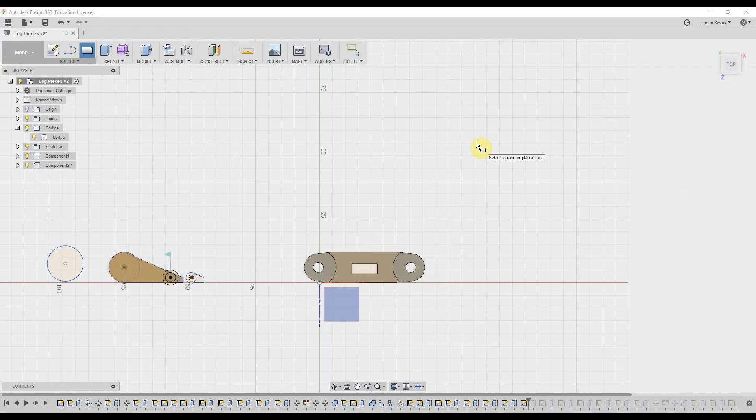So now we've got the foot bone and the shin bone created. It's time to make the thigh bone. And this one's a little bit more complicated because it requires a few extra steps. This is pretty much the same dimensions as the shin. So we're going to create a rectangle that is approximately 25 millimeters by 12 millimeters.

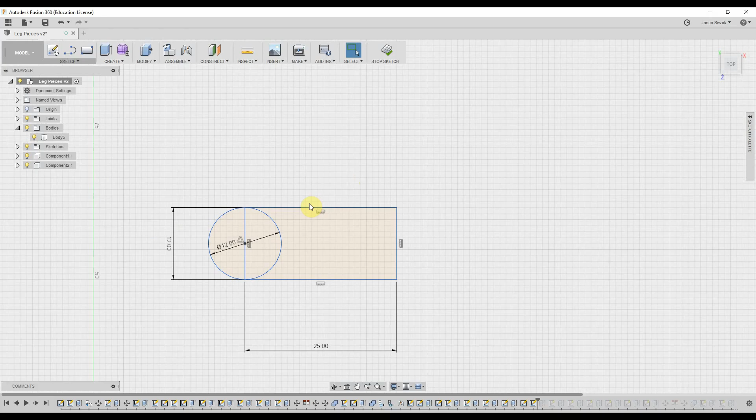Next, we're going to create a circle, and our circles should be approximately 12 millimeters in diameter. We're going to do a simple extrude here of this piece, and that's going to be 12 millimeters in height.

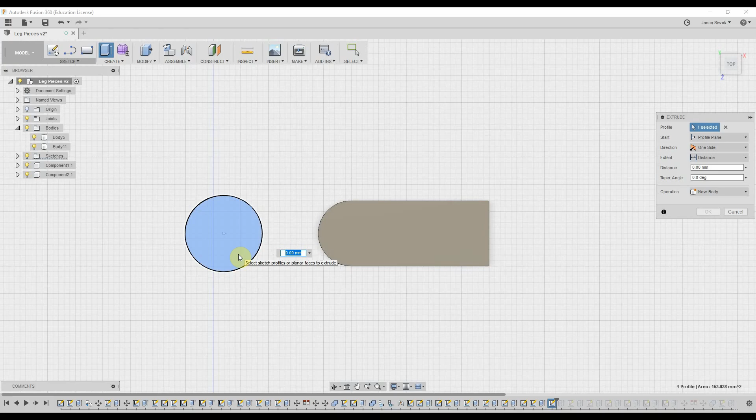Next, we're going to have to make a cylinder to insert at the edge of this to cut it out. This cylinder we're actually going to make a little bit larger than the 12 millimeter diameter. We're going to make it 14. Do a simple extrude. Now, according to our blueprints, this has to be 8 millimeters in height.

Then we're going to do a quick align. We're going to hide that other body. So now we come up here to modify. We select two objects we want to align. Which are these two. Notice how they fit seamlessly in there.

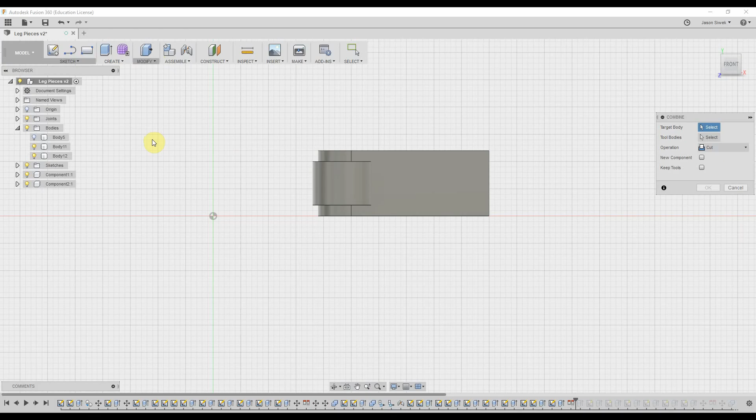Click OK. Next, we're going to go back under modify so we can actually do some subtracting. On the right side, make sure that your operation is indeed cut. Start with your object that you want to keep, which is this one. Then select the object you'd like to subtract. Notice how it turns pink. Click OK. And there we go.

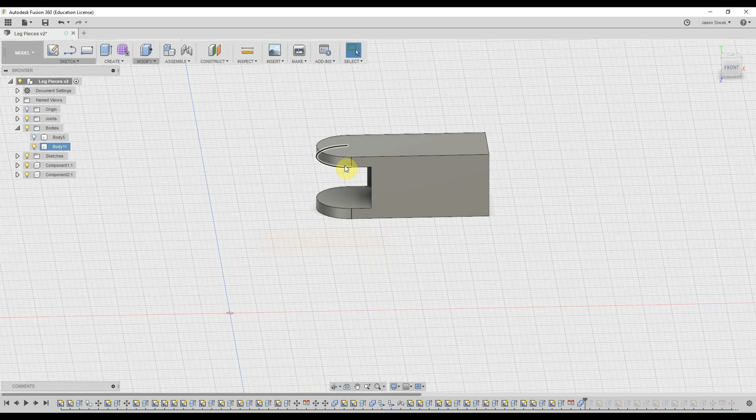Now we have to create the rod that connects these two round pieces so they'll create the actual hinge when it's merged. Make a simple circle. This circle will be 3 millimeters in diameter. Extrude it by 8 millimeters.

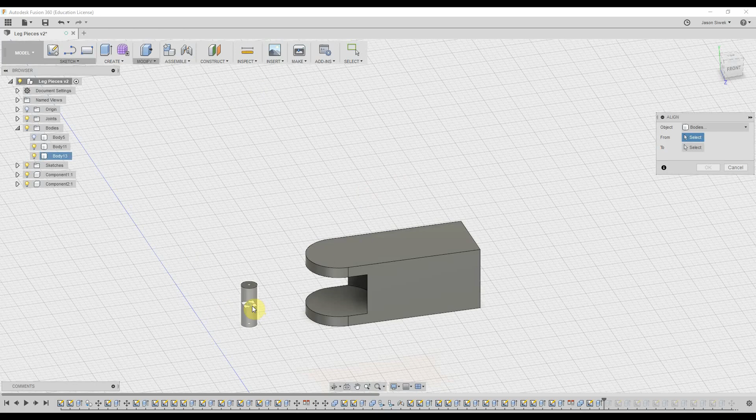So we're going to do some quick aligning here. We're going to go up to modify. We're going to hit the align button. Click on that shape. Click on that. You'll notice that it's perfectly aligned in the center. So we're going to move the rod up by 4 millimeters. And there we have it.

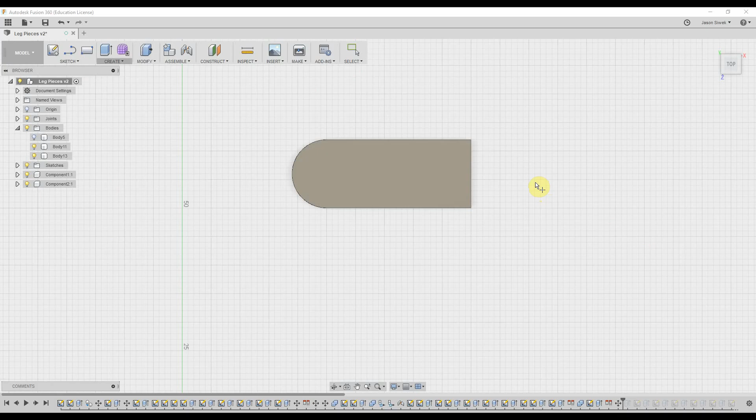Alright, for this next part, what we're going to do, we're actually going to make a sphere. Come up under create, hit sphere, and select the plane you want to draw it on. In this case, I'm drawing it on this plane. We're going to have a sphere of 12 millimeters because we're going to use this sphere and we're going to cut it in half and then we're going to merge it with the leg. So 12.

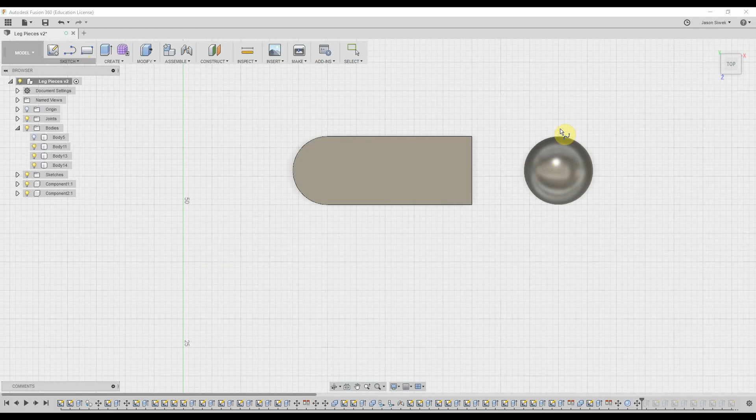What we're going to do, we're going to sketch a spline. And the reason we're sketching a spline is because that's how we're going to be able to cut this unit in half. And we're going to draw a line cutting this sphere right in half.

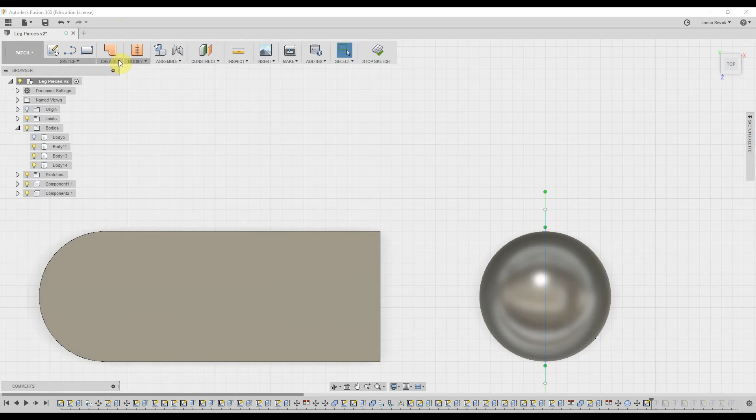Now, this is where we go into a little bit different tool set. We're going to come up here to the upper left-hand corner, and where it says Model, we're going to drop that down. We're going to hit Patch. And under the patch, we're going to hit Create. Then we'll hit Extrude. We're going to extrude that spline, and we're going to extrude it 20 millimeters.

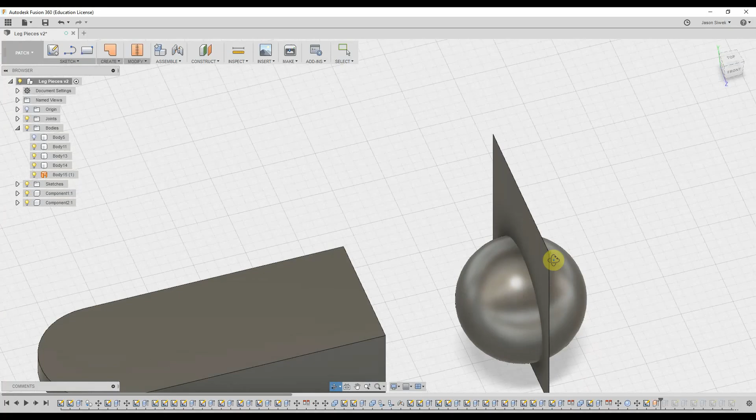I want to make sure I have enough to go completely through with it. Think of it being like an apple and a knife. The spline is the knife. The sphere is going to be the apple. So you'll notice I have a line there, and look, it looks like a giant blade is cutting through. Alright, so now we've got this large looking blade through the sphere.

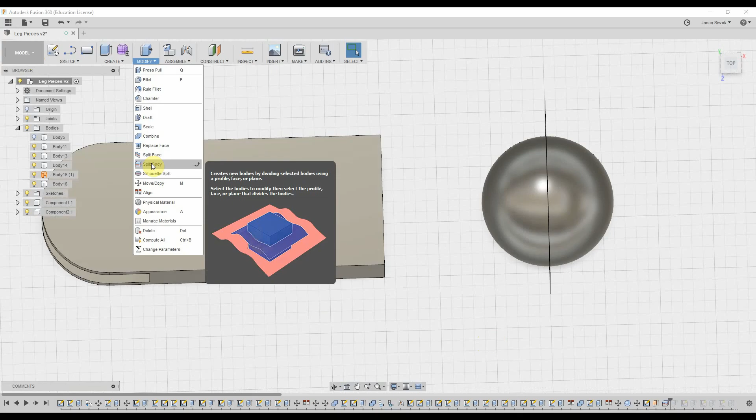What we will do next, we'll come back up to the upper left hand corner under patch, click that so we can go back to our model. Once we go to that, go under modify, and then go under split body. What you'll notice on the right hand side, we have some options here. It says body to split. We're going to select the body we want to split.

In this case, it's the sphere. And what you'll notice when I hover above it, it kind of goes gray to let me know I can work with the whole body. Click on that, it turns blue. Next, the splitting tool.

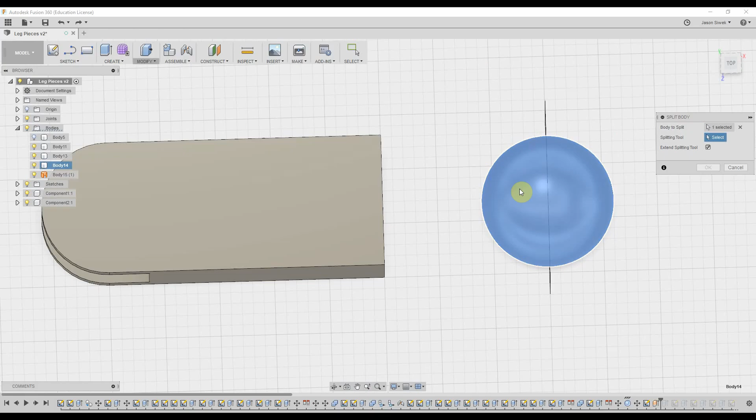What are you using to cut it in half? In this case, I'm going to be using the blade here that I made from the spline. Click that, and then go ahead and click OK. I can now select my move tool and move this part of the sphere up there.

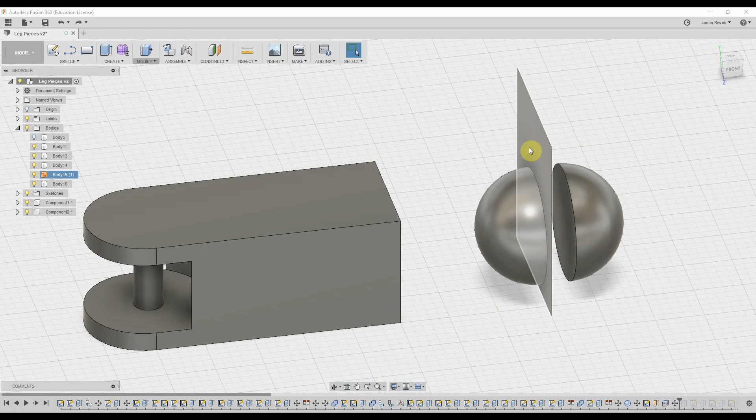Now that we have the pieces split, we're going to get rid of this piece, the blade. We can just come up here, right click, and hit delete. Then we're going to come over to this piece, which according to here is our body 16. I'm going to right click and simply hit remove.

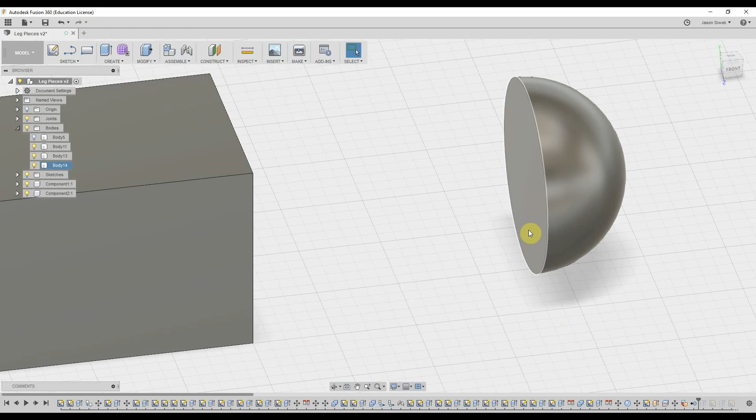Our next step is we are going to make this hollowed out, because when we go to put our joint in, we're going to need to have it so we can put the ball joint in. So we're going to click on this flat side of the sphere, come up to Modify, go under Shell, and we're going to have a 2mm sidewall.

Now that we have this half of a sphere hollowed out at 2mm for the sidewalls, for the moment we're going to hide that body.

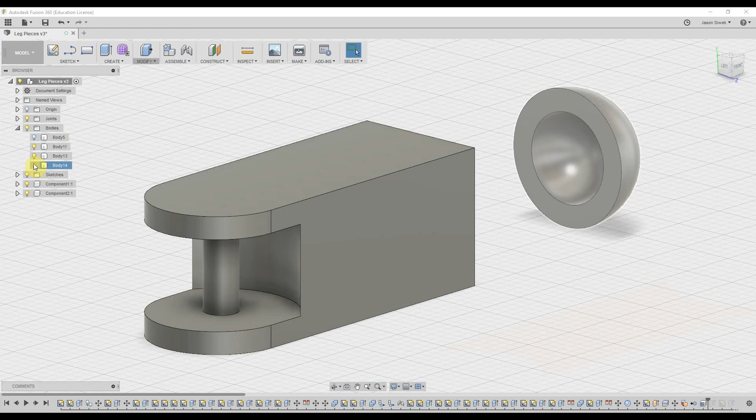What we're going to do next, we're going to work on this side of the object, because we need to make a hollow shape. So when we put the ball joint in, half of it will go in that half of a sphere, the other half will come in and set nice and neat here.

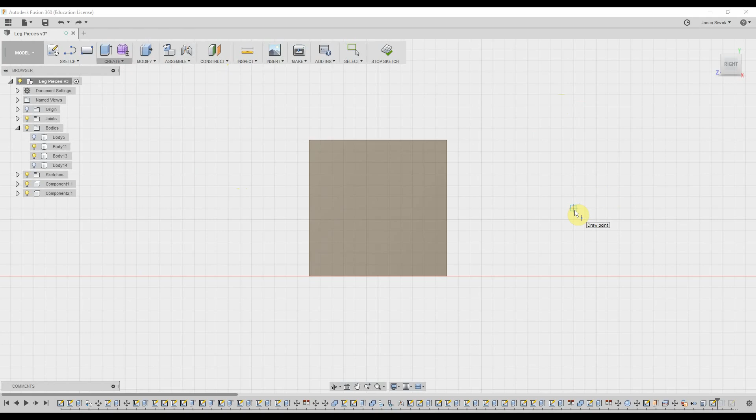While working on this side, we're going to create a sphere. We're going to put it right here, and we need an 8mm sphere.

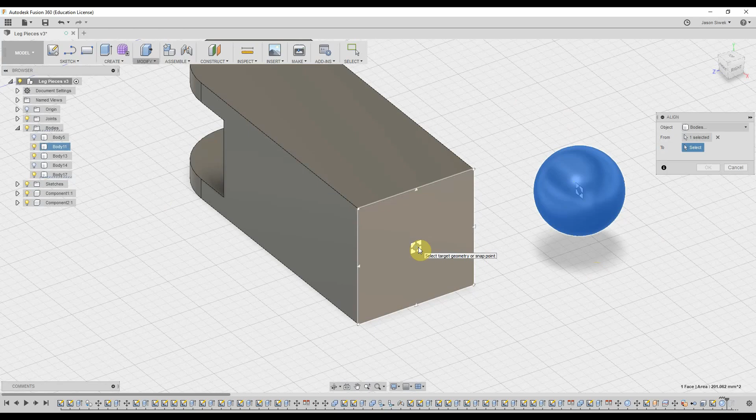I need to align it now with this shape. Simply go up to Modify, hit Align, select the sphere first because that's the shape we're moving, and click on this rectangle here because that's where we're moving it to. And there you go.

Now we want to combine the two, and we have a good bowl cut. Once we have that bowl cut into the inside of there, let's go ahead and make our other sphere reappear, because we're going to be working with that.

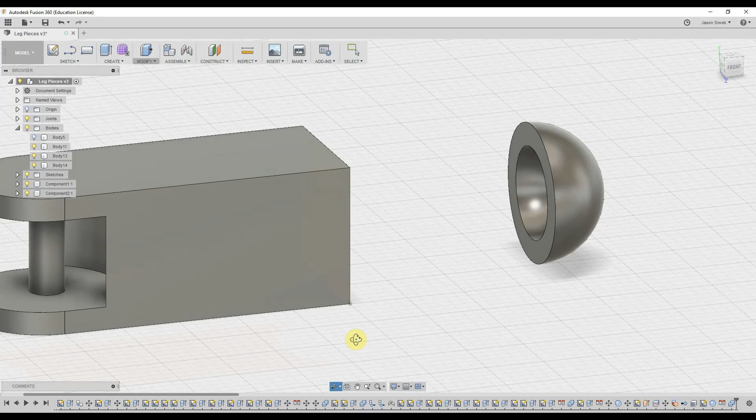We're going to make some notches, some cutouts, both on the side and the front of this thigh to help reduce issues with the 3D printing process.

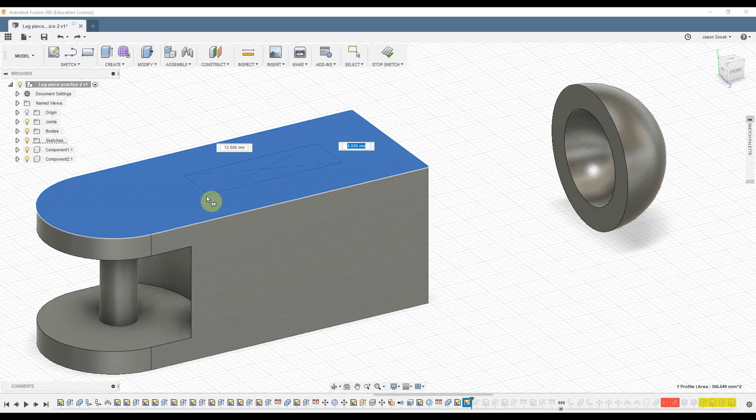Let's go ahead and click the top plane right there, and we're going to make a rectangle, but we're actually going to do a center rectangle so we can work out from the center. We're going to make it 4mm wide and 12mm in height. We're now going to extrude this shape with a -12mm.

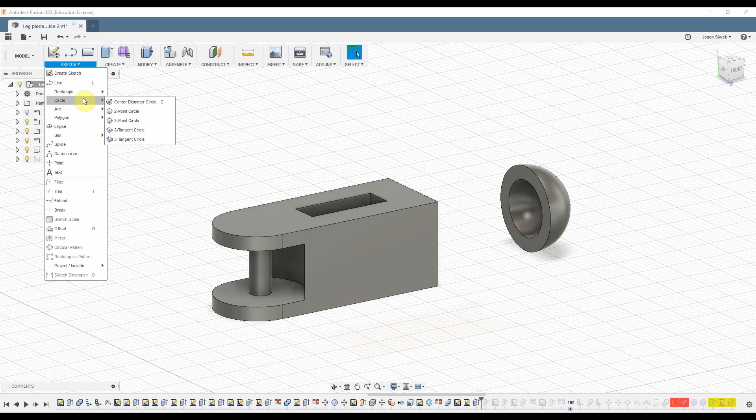Then we're going to go to the front of this shape and do the same process, make a 4x12 rectangle, and extrude it with a -12mm.

Now that we have the notches cut out both on the side and the top, we're going to make a slot for the actual ball joint to fit in. Let's make a center rectangle.

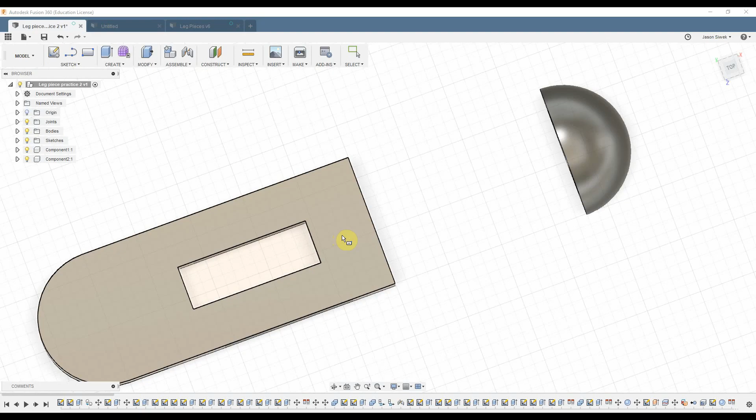When we make the center rectangle, we are going to click on this plane right here. We're going to have this 6mm in length and 4mm in height. Now we will extrude that, doing a -4mm extrude, so we have a nice, neat, clean cut through right there for the ball joint.

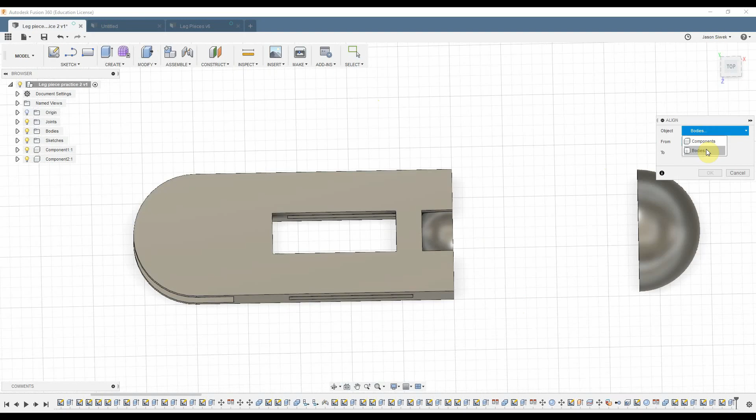Let's go ahead and merge this half of a sphere to this body. Come up to Modify, go to Align, make sure that your Align is set to Bodies. We're going to click the inside here, and we're going to click the inside of the other one, and there we have it. What you'll probably notice is that this piece over here was not combined, and that's due to my own error, so we're going to correct that.

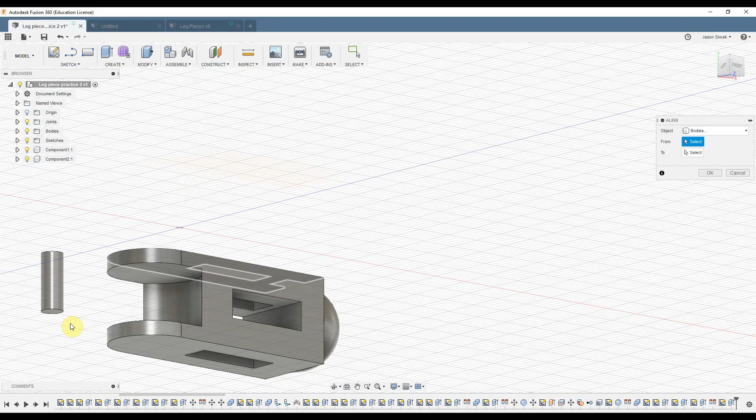We need to make sure that rod's back in here. Under Modify, we will select Align. We're going to select the bottom of this, and it's going to be aligned with that part.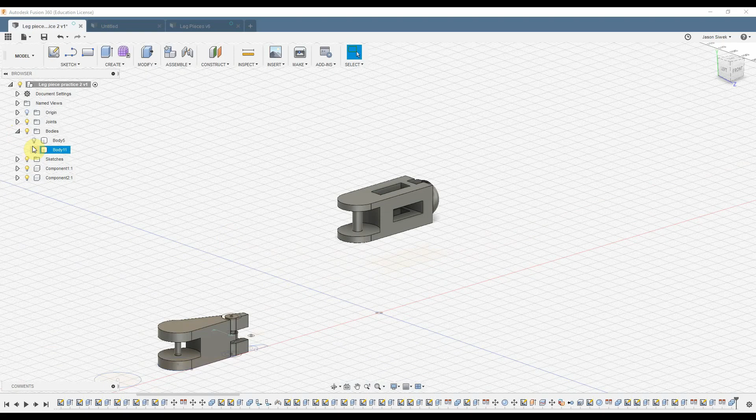Now that we have this as a solid body, we're going to start assembling all three parts to make components and also joints. The first thing we need to do is make sure all our pieces are shown, since earlier we had to hide one of our bodies, the centerpiece. Now we'll start assembling these pieces in the correct order. If you recall from the first video, we had to take this part and turn it into a component rather than a body. We'll need to do the same thing with these newly created pieces.

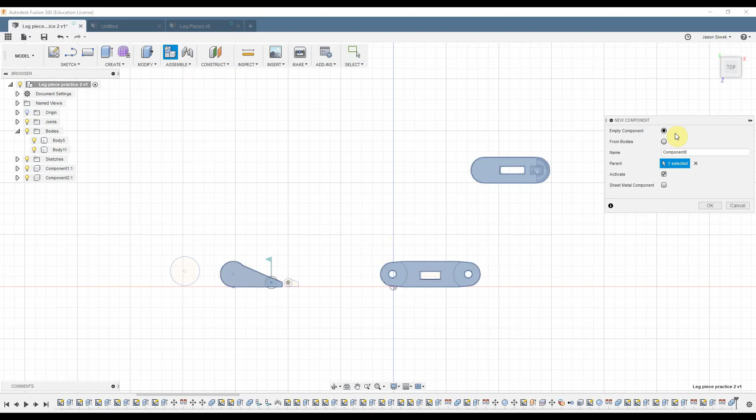So let's come up here to Assemble. We're going to hit New Component, then From Bodies, and make that a component. Then we'll repeat that process for the top piece. We have 4 different components we're going to be working with: the heel, the toe, the shin, and the thigh. We're going to flip this on the side so we can see the hinges.

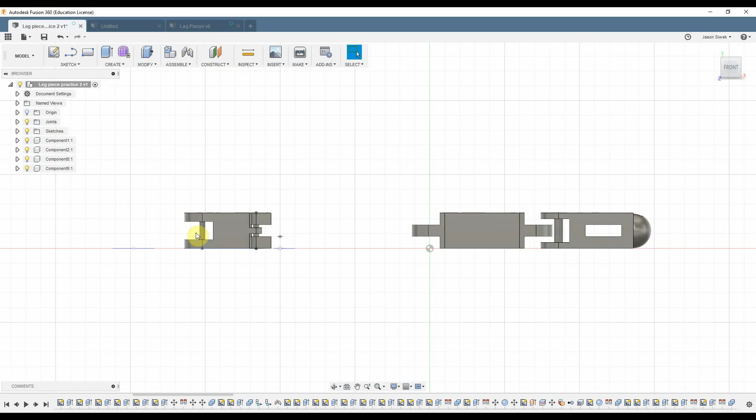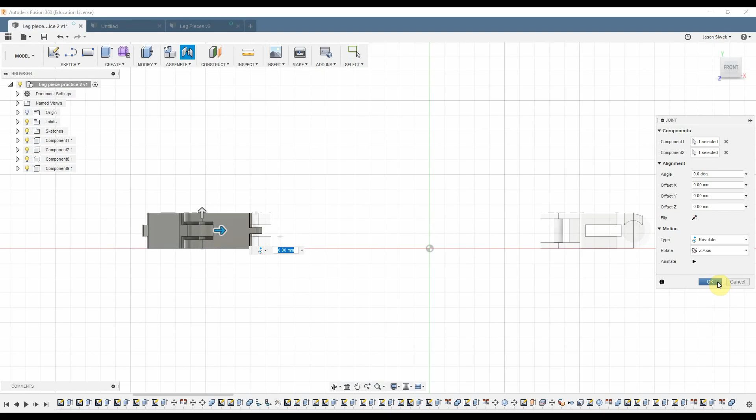So we're going to come up to Assemble, go under Joint, and make sure our motion type is once again set to Revolute. We want to take this piece, this hinge, and select it to connect with that rod. We'll click OK, and if we look at this from a top perspective, we'll see we have those two pieces connected.

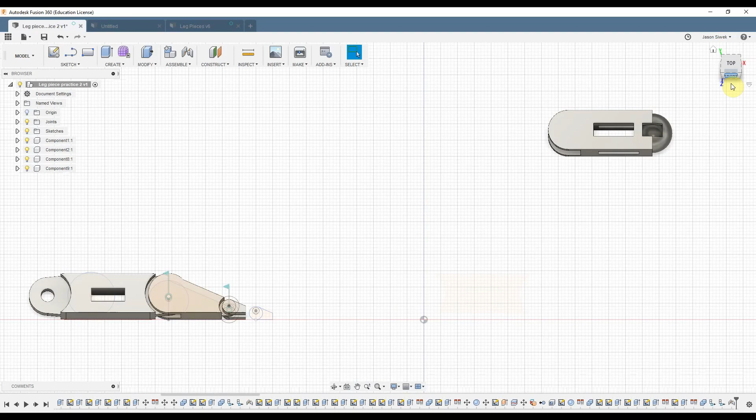Pretty sweet. We're going to have to do a little bit of rotation with this piece, because if we try to assemble it right now, it just won't work correctly. So let's go back to our side view.

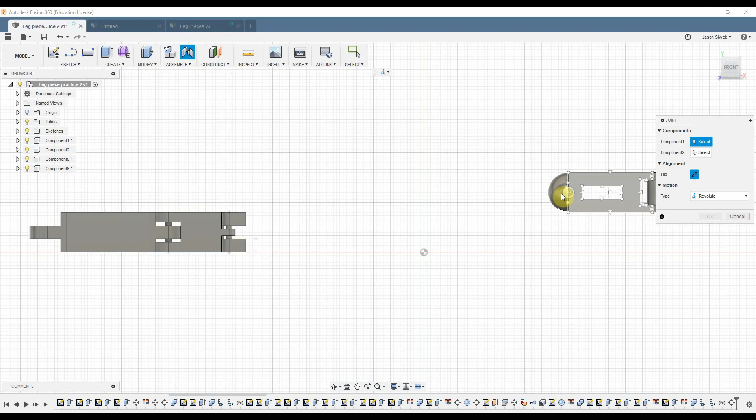We're actually going to move this, and we're going to rotate it by 180 degrees. Once it's rotated, let's go make our joint by going up to Assemble. We're going to make this piece attach itself.

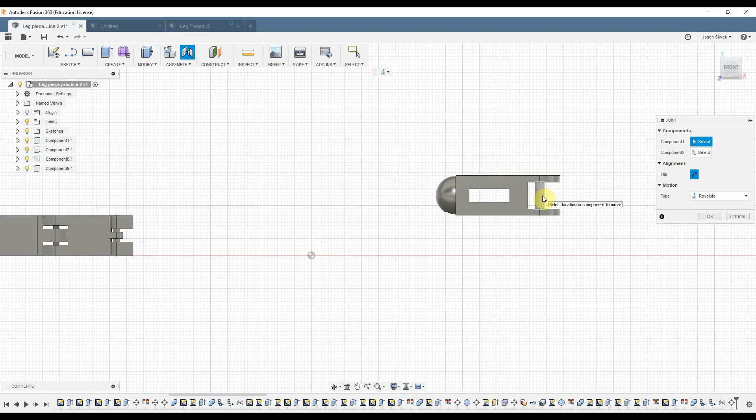Once we have it rotated, we'll create a joint by going to Assemble, hit Joint. We select this rod, make sure once again your motion is on Revolute, and then connect it to the hinge from the thigh. And there we have it — we have now completed a leg.

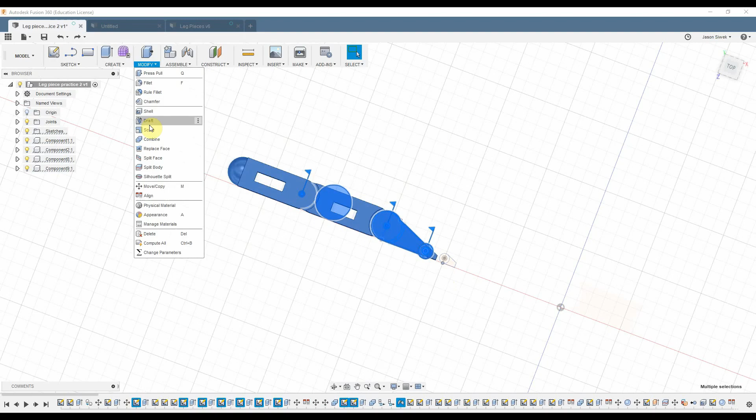The last thing we're going to do is combine all these shapes here. Go up to Modify and Combine. The reason we've done that is you'll notice this leg has one slot right here for a ball joint, and unless you plan on making a pirate, you're going to need 2 legs at least.

So what we're going to do is replicate this part. But we can't simply make a copy of it, because then it would always have this cutout on the same side, meaning I can't assemble it since the joints would always be on the inside of the left leg. So I need to make a right leg.

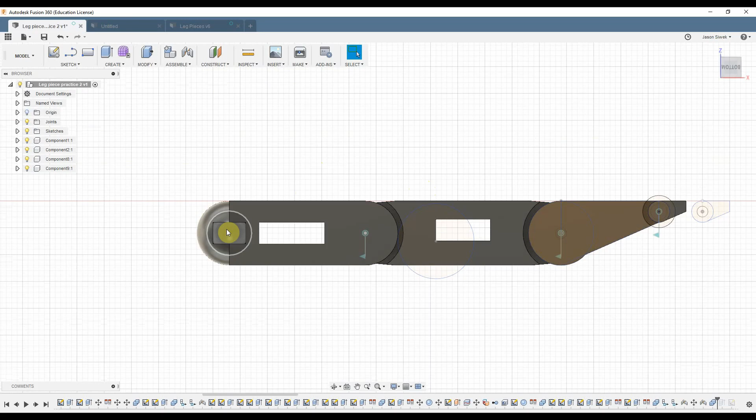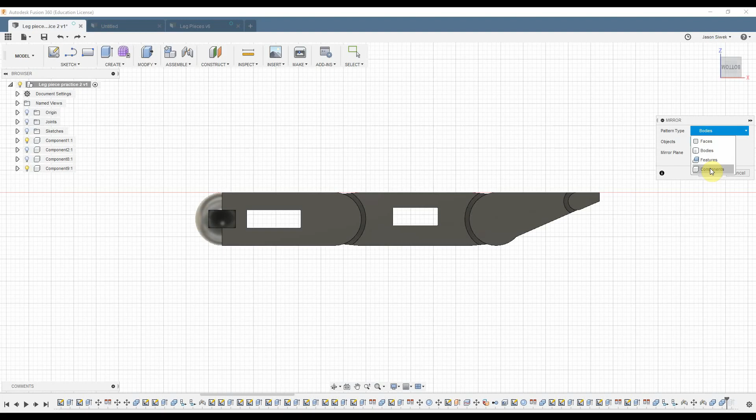One fast way to do this without repeating the whole process is to mirror this whole leg. We'll come up to Create and go under Mirror. Under Pattern Type, we'll select From Components, since this is now a component. Go ahead and click Component — it turns blue. Hit the spot where the mirror plane is going to take place, which is right there.

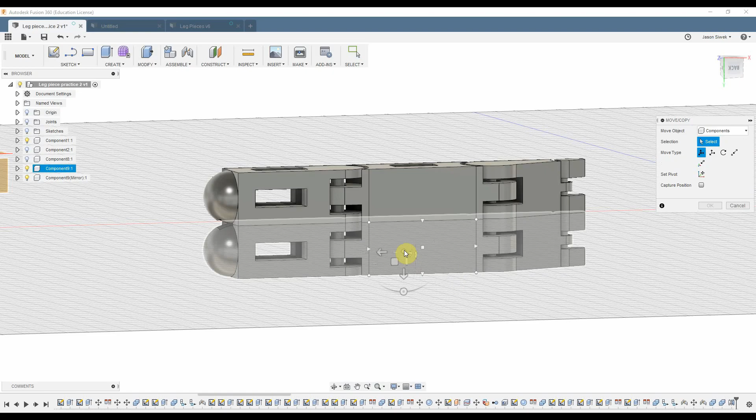Then hit OK, and if I rotate this, you'll see there are 2 independent legs. I'm going to go ahead and move them so they're not on top of each other. Simply click M to move. Make sure, once again, that you are selecting components, not bodies, since we've now made these into components. We can move that leg out of the way and put it up here on the same plane with the other one, then click OK. Now we have 2 functional legs that we're going to use for the duration of our action figure.